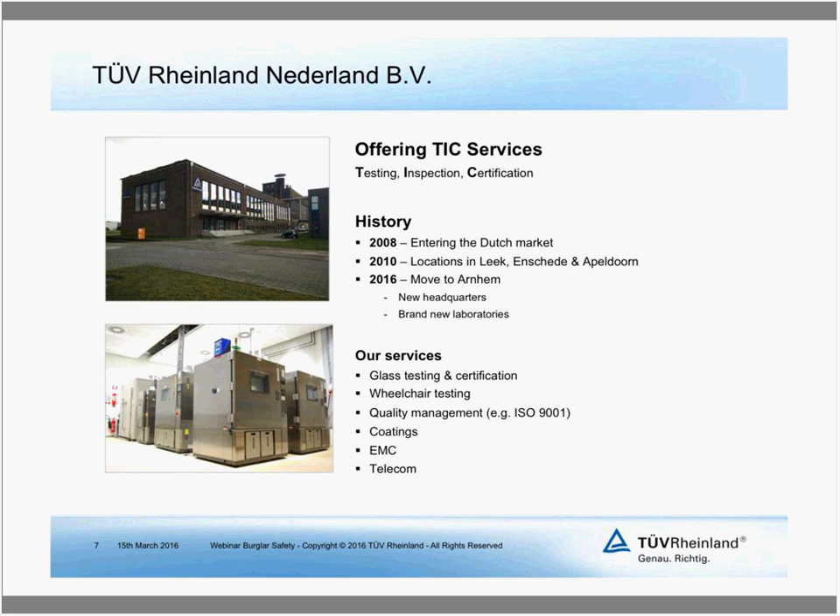We are a global competence center of glass. Rheinland is well involved in testing in the glass business, and most of the testing is done here at our laboratories in Arnhem. We supply 58 different tests, a large part for the construction and building industry, but we also do something about packaging and tableware. We test the bottles, for instance.

We apply services for solar applications, photovoltaic modules. We do testing in the automotive glass business, glass as well as plastics, and we do testing and certification in windows and doors. For distributors, we have relations in 45 countries -- that was in 2015, and we are still growing there.

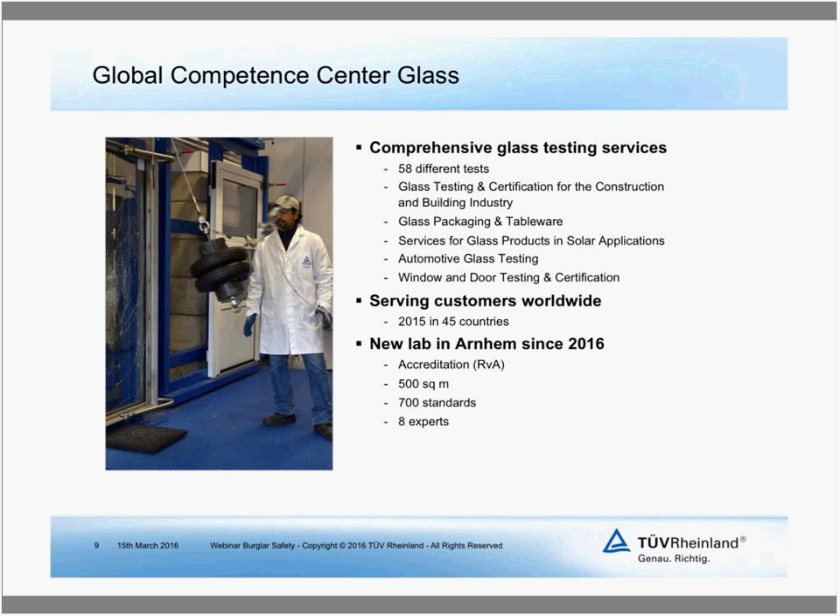In our new laboratory, we have a lot of accreditations based on glass, of course. We have 500 square meters of services available. We are covered in all 700 standards, and we do that with 8 experts. We have a lot of things we can support you with.

Now over to the testing standards of burglar safety. Why your glass and your construction should be tested, or must be tested, is that there are a lot of burglaries or burglary attempts going on. In the US, 2 million last year. And for the Netherlands, for instance, 250 attempts are done every day, and only 13% of those are solved.

So you have problems with financial things, but also emotional ones. If a burglary attempt is going on, most times afterwards you have to replace your doors, your glass, or your infill elements, whatever, because the majority of burglaries are done with force and some even with brute force. So it's our experience that if it takes too much effort for this burglary, that's the time your house will be bypassed.

That avoids a lot of damage. And of course, your insurance company will also be very happy because there's a lot less damage done. So there are a lot of benefits for you.

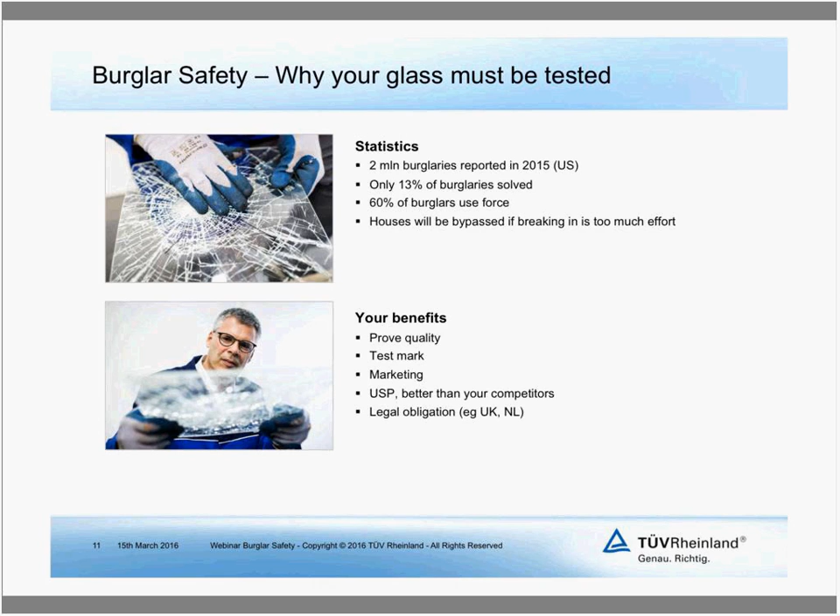Now, if we look at the standards for burglar safety, the first and maybe the most well-known is the EN 356, which deals with glass in buildings and security glazing.

The scope states that it is intended as a test method for resistance to forced access into a room or a building, for a short period of time.

Of course, you can break into anything if you have sufficient time. The main reason for this test is to establish a certain delaying period, so that an alarm can go off, the police can be warned, or it makes too much noise or takes too much time, and the attempt is broken off. That gives you a classification related to how long that delay is.

It also gives you a classification, the category of resistance. This is not assigned to a specific application.

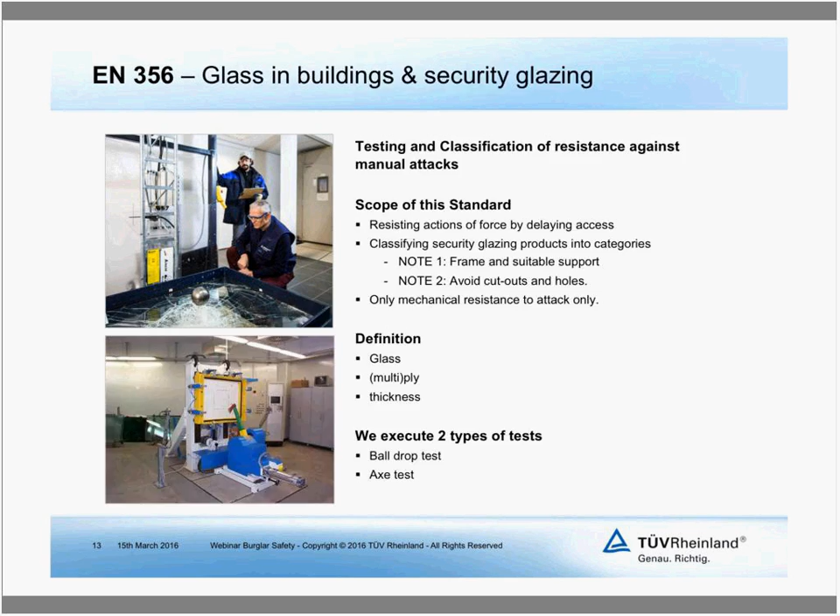The drop test is resistance to a hard body impact, the hard body being a steel ball of approximately 4 kilograms. The diameter is specified, and also well specified are the drop heights. The drop height is how your impact is classified: the higher the drop height, the higher the impact will be. For every drop height, 3 balls will drop in a certain pattern, and the pattern is also well described in the standards. And for the highest class of the ball drop test, even 9 impacts will be put on the glass sample. So the test is quite severe.

And what you will see is that if you have a very rigid sample, the sample will mostly break, but the ball will be reflected by the impact, and some get as high as 2 meters in the air again. It is performed at room temperature. The temperature is described in the standard. The humidity is not described, but at normal room temperature the test can be performed. And after each impact, the loose fragments shall be removed so that the test is reproducible. If you perform the test again, you should get the same test results, or at least as close as possible.

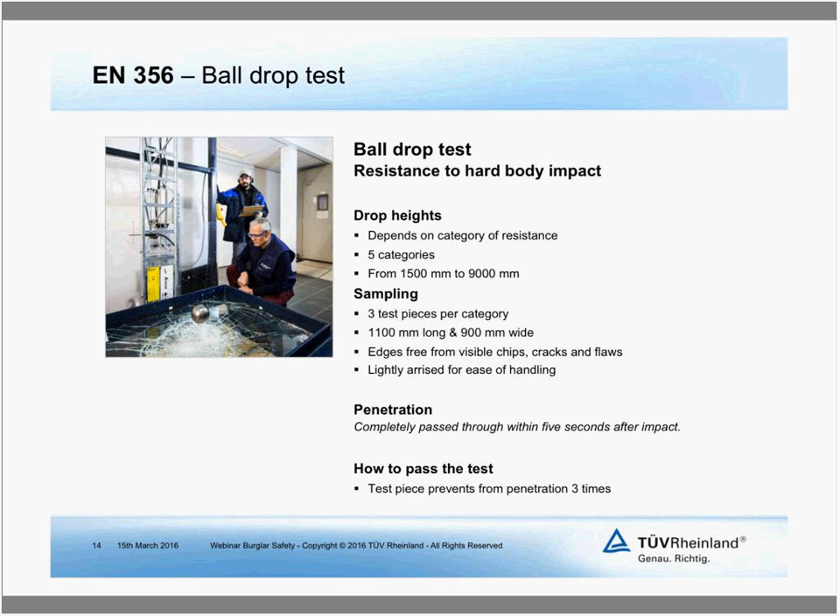The next here is the axe test. 2 tools are used, axe and hammer. It may surprise you, but if you try to break glass with the sharp side of an axe, it's very hard to break the glass. That's why a hammer is used to break the different glass plies, and then a well-described axe is used to penetrate the sample.

And why is the axe so well described? Well, you want the test to be reproducible, and you repeat it on several samples. You want to get the same test results. So therefore, the thickness of the axe head is described, as is the angle of the blade and the hardness of the blade. And every 10 impacts, the blade is even resharpened and checked for hardness. And if the ridge of the axe head is worn, the axe must even be replaced, and that's done to ensure the reproducibility of the test.

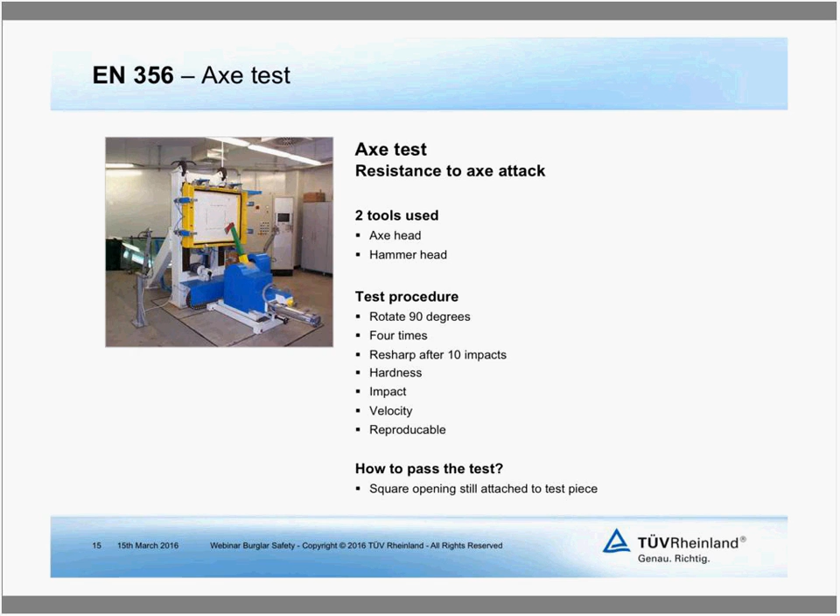About the glass testing: for burglar resistance, you also test your constructions, and that's more different from the glass testing. Because in the glass testing, you have a very good version of your test and your reproducibility, and in your construction testing it is somewhat different because you have a whole lot of different possible constructions.

Here is what is set in the scope of the standard. It is a system which specifies requirements and the classification systems, and it has to do with the burglar resistant characteristics, and it has to do with doors, windows, curtain walling, grilles and shutters, and some items are excluded. For instance, garage doors and gates and barriers. There are some other standards for the testing of those. And here it says something about the resistance to attempts at forced entry.

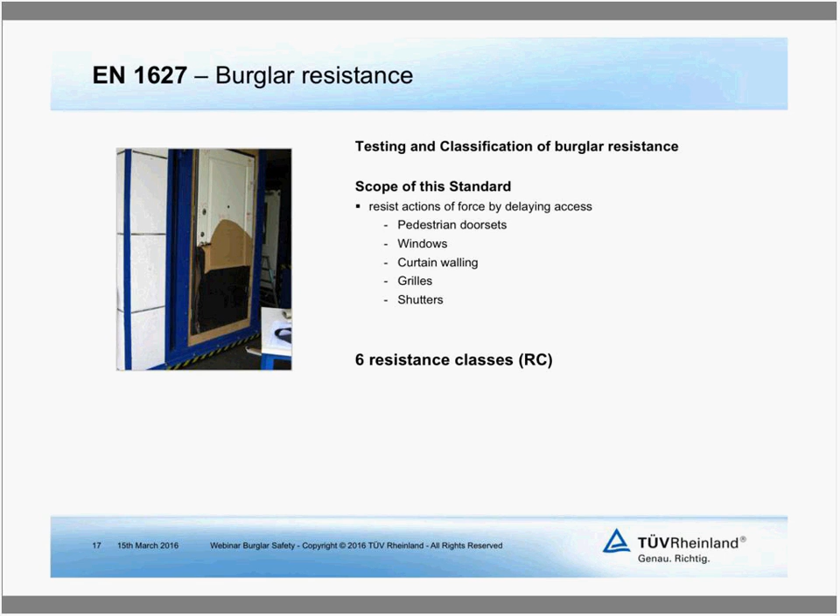It is something about the grouping of your products. Not every product is in the same group. It says something about different classes for groups, and it has something to do with the opening of the elements. So if you can turn a door, that is a normal door as we know it, or a normal turning window, then it's listed in group 1. For instance, a sliding door or sliding motion, that's done in group 2, and group 2 being the majority of your products.

There is a smaller group 3, for instance, a roller shutter. You can have a normal window, which is in itself not burglary resistant. Then you can put a roller shutter on the outside, which has the function of burglary resistance, then it goes into group 3. And then you have some special products which are listed in group 4, for instance, a grille or a ventilation opening or things like that.

And besides that, in the 1627, you can also find your field of application. A certain product has been tested at a certain dimension. It does not mean that everything that is changed from your tested dimension has to be tested again. You can find some applications for that, and some substitution rules. So, for instance, if your dimension is somewhat bigger or somewhat smaller, it might fall under the same tested product. And it can be very convenient, of course.

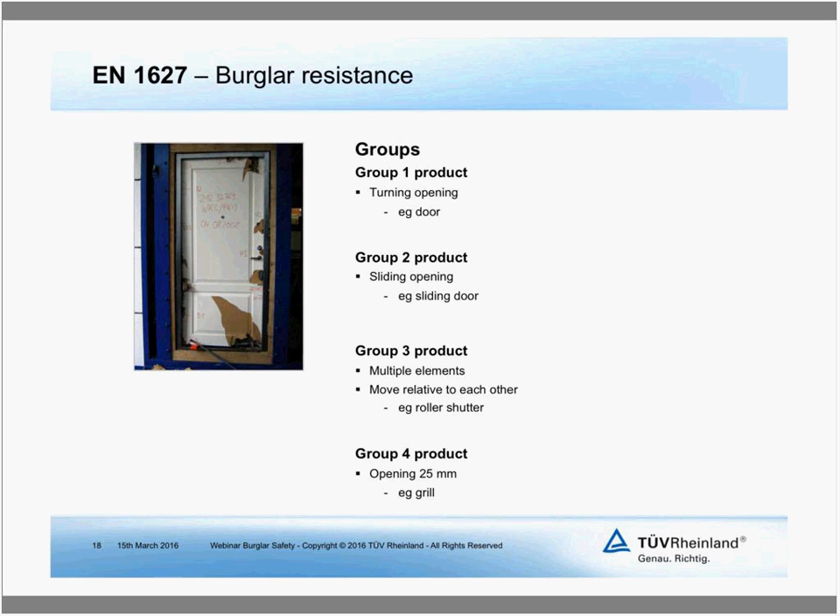If you test resistance class 1, then you need only one test specimen. All the other resistance classes, you need at least 2 test specimens. And you can also have more than one attack side or more than one opening. So you can have a construction product with a turning leaf, but also with a sliding leaf. That is possible. So those are procedures you can find in the standards EN 1628, 1629 and 1630. Will be described later.

If you test for resistance class 1, you ought to follow some national rules, some national regulations, and that applies for all the things that are done. The European standards are a sound basis, but every country may have its own specifications and its own building regulations, so additional testing might be undertaken. You have more than one test specimen. Normally on the first test specimen you will do a static test, a dynamic test and a pre-test. And on the second sample you will undertake your main test.

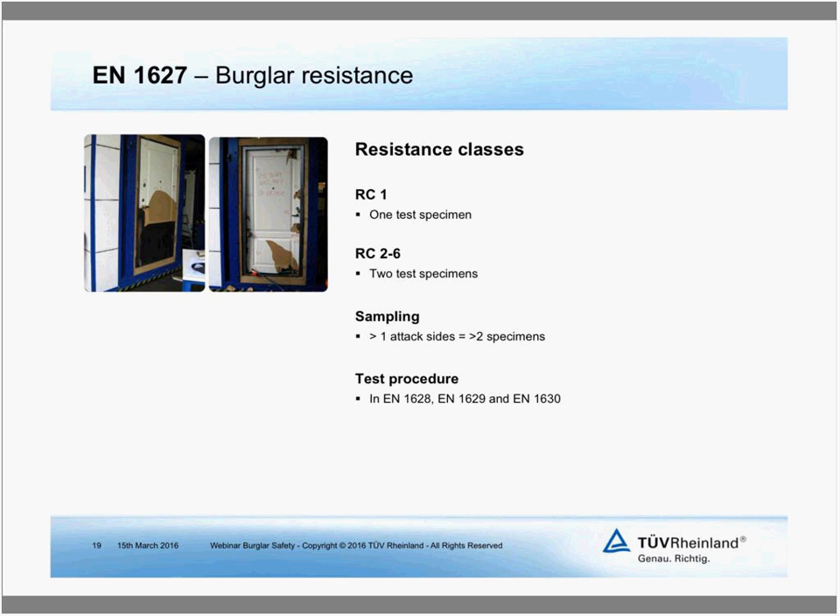Well, let's talk about the standard for the static loading being the 1628. It has a scope, and it's about the test methods for determination of the resistance to static loading. Of course, it has to do with all the opening types which are listed here. This is what we call a long-term loading, long-term being more than 5 seconds. And the loads you apply are listed in the EN 1627 for each different opening type or the groups you have specified before. To give an indication, the loads can go from 3 kilonewtons up to 15 kilonewtons. The load itself can be quite severe.

Ways of applying your loads: it can be done by a load applicator or by hooks or by straps, by pressure pads. The definitions of those applications are all listed in the standards. And one of the important things described there are what they call locking points. If you have a movable leaf and a fixed part of your construction, then you have a connection between those two, and it might be your locks, your bolts, your hinges, your fixings, your rings, your bearings, whatever you can come up with, some junctions, and that's all listed under the term locking points. Those are the points that are loaded with the force listed in EN 1627. The sequence is described in Annex B of the standard. So we have a fixed sequence, and you move all those points.

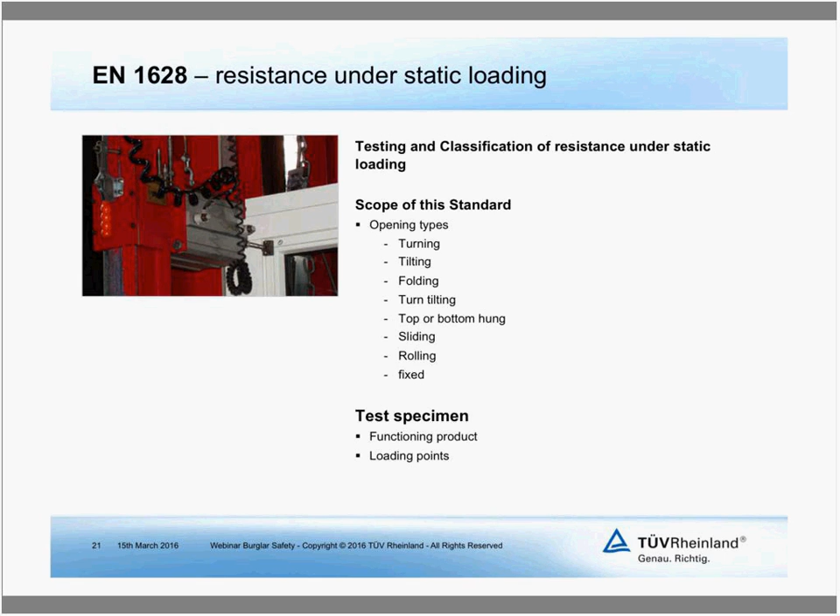Short summary of the test. You use gap gauges to look at the attack side of the sample, at the locking points, the connection points. If the gauge does not penetrate the test specimen or the opening that is forced, then it has passed the requirements.

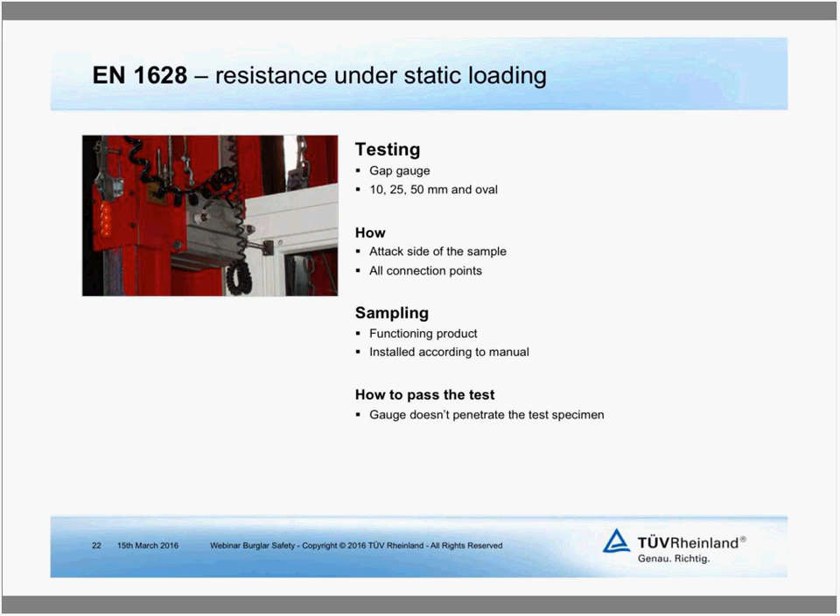Well, that's a dynamic loading test. A dynamic loading test is a short load, a short force applied. Of course, the openings are listed here, the turning, the tilting, the sliding, etc. The standard has a scope which is quite similar to the previous scope. It's all for the determination of the resistance to dynamic loading and to assess the burglar resistant properties of your product.

Some definitions are listed here. For instance, your impacting unit, the impactor, which is suspended by a suitable cable, a steel cable, and the pendulum itself is a body used to strike the test specimen at different locations. The impactor is actually the same as is used in the pendulum impact for the glass, which is listed in EN 12600, and you can find a full description of the impactor there. In 12600 it is used to establish whether or not you have a safety glazing, and here it is used for applying a force on your construction product to see if it can withstand a burglary attack. And the impact points are also well described. The forces applied, the drop height you should take, are also listed in standard EN 1627.

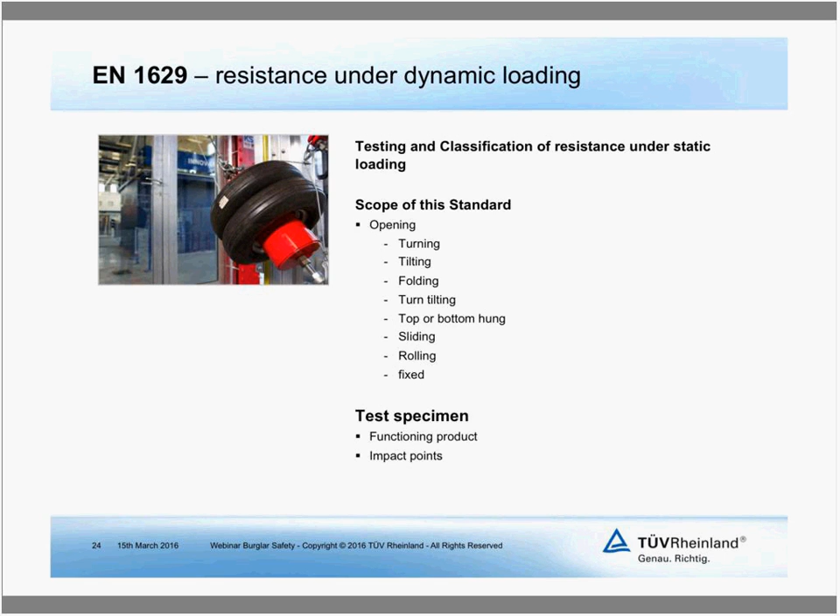You strike the test specimen with a pendulum impact, which is suspended by a steel cable of fixed length. The height is regulated by the different groups and the different drop heights.

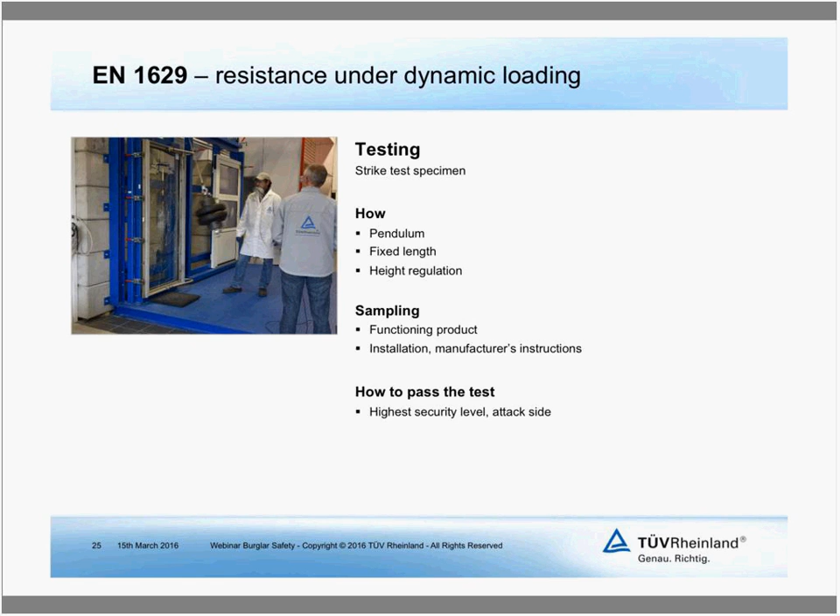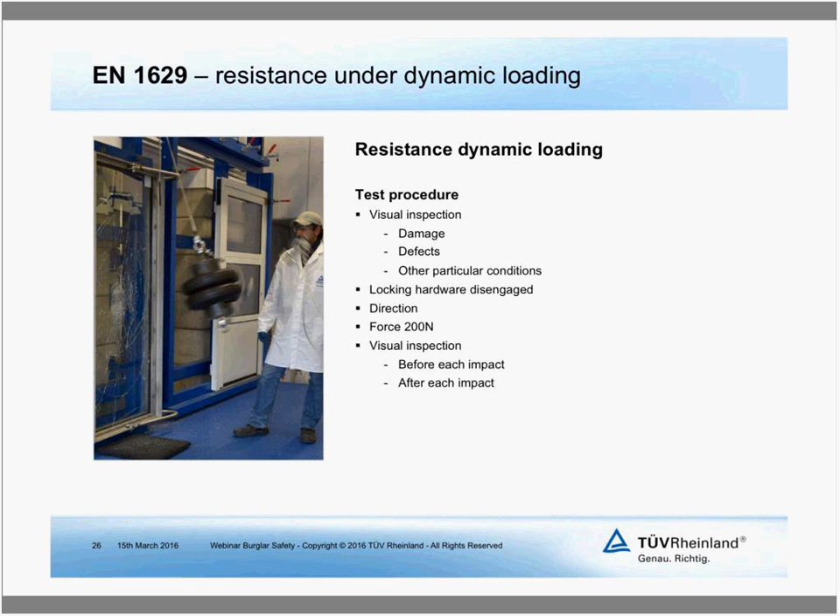That's something I've already spoken of before, so we can skip that. Then we move on to the last topic: manual burglary attempts.

What we're actually trying to do is mimic an actual burglar attempt. So we have set up sets of tools which represent actual burglar attempts undertaken.

Of course, this standard also has a scope. This is the method for the determination of resistance to manual burglary attempts, where you test the burglar resistant characteristics of your building product.

Definitions are listed in the standards. Your tool sets are clearly described.

Because it's a manual attack, your resistance time is described. Every resistance class has its own resistance time, and the total time can be up to 50 minutes. You are allowed to undertake some resting times during the test.

The test itself can be restraining or straining for the test persons.

If you change some tools, there is tool time, but there is also observation time. Some member of the test team will observe the test, and all those times together will result in a total test time, which ranges from 15 up to 50 minutes.

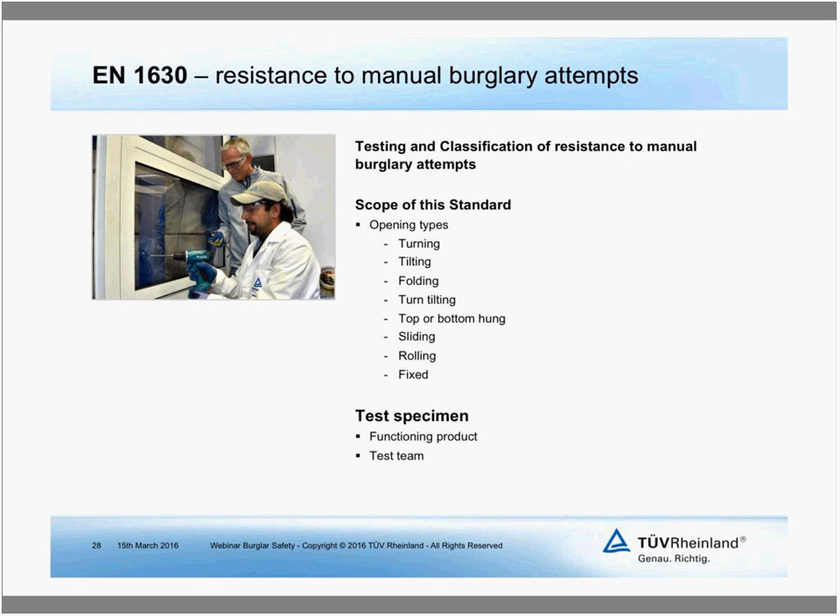By doing that, you have certain tool sets available, some of which are listed here. For low classes, your tool sets are quite simple, and when you go to a higher resistance class, some other tools are added. So in the highest class, you can use all the tools from all the tool sets, giving you a wide range of tools available. You can pass the test if no accessible opening is obtained.

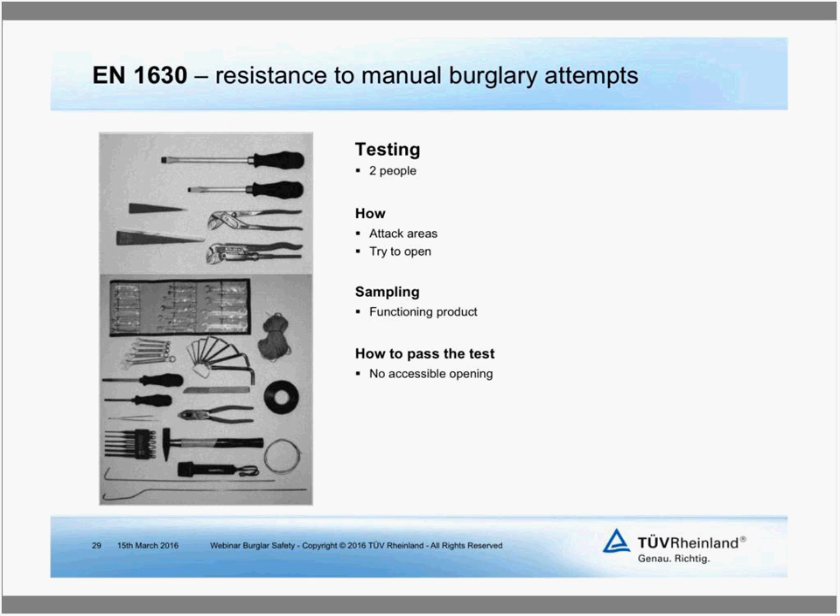So a short summary of the burglary attempt: you have attack areas, you fulfil a pre-test, and you do a main test. Imagine if you have done the static loading test and the dynamic loading test, and then you have to perform a manual burglary attack, a pre-test on your first sample and a main test on the second sample - some will get very tired after performing all those tests. It is really straining on the test person.

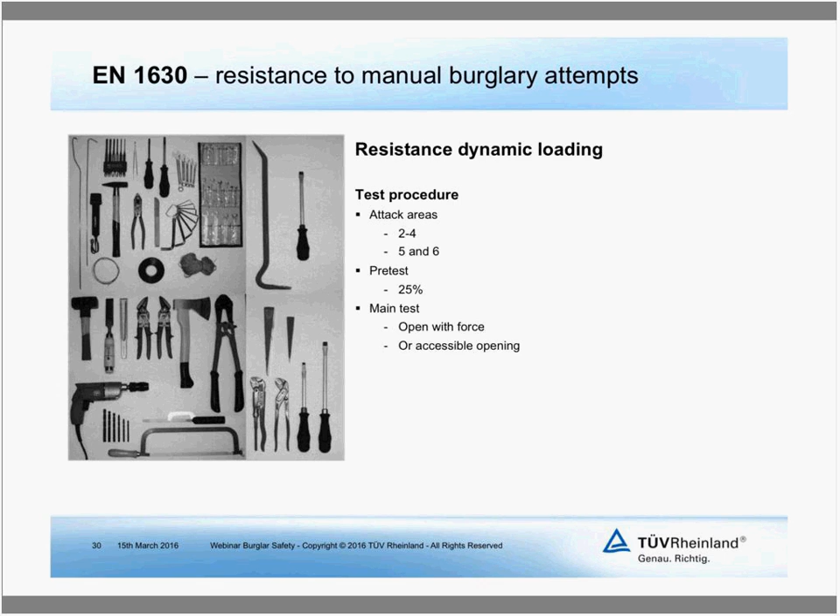Well, this actually concludes all the test standards for burglar safety. The EN356, which was the ball drop test and the axe and hammer test for the glass. The 1627, which gives the requirements and classifications for burglar resistance. Three actual test methods: the static loading test, performed on the first test specimen, and the dynamic loading test, also done on the first test specimen, which are mechanical tests. Then you do the manual burglary attempt test, which is 1630 - a pre-test on the first sample and then the main test on the second sample. So that concludes our testing standards.